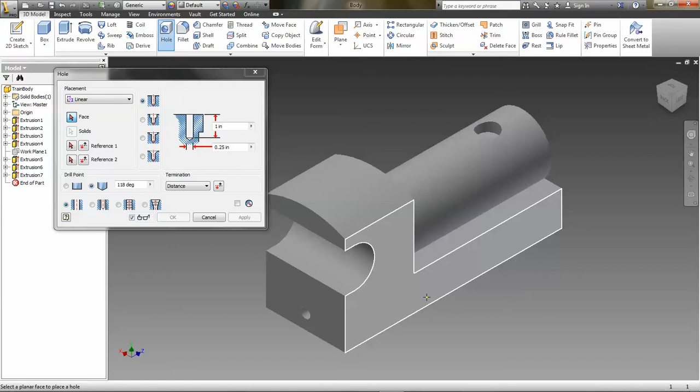Now the way this works is, and I see a lot of students have problems with this, when this dialog box pops up, or in future versions the marking menu or what have you, you'll notice I can pick any plane, right? Well, because Inventor is asking me which plane do you want to drill the hole in, or which face. So you can click anywhere and it's going to start to create a hole in that spot. That's not where I want that hole.

Now most students will try and click and drag that around, but the easiest way to define the location of the hole is to select, notice how reference 1 is highlighted here? It's going to ask me for an edge and allow me to type in a distance from that edge. So if I just click an edge there, now notice that red dashed highlight.

I can see from the dimension isometric drawing that I want that hole to be 1 inch from that back edge of the train. Then notice it automatically selects the reference 2 cursor. I just click the bottom edge, and now it lets me select the height of the center of that hole from the bottom, which is 0.5 inches.

Okay. Now the only thing I have to do now is make sure I select the proper features, because if you notice on the dimension drawing it says it's a 1/4-20 threaded hole. So the size is 1/4 inch right here, that's fine. Class 2B, that's basically the quality of threads, that's fine. 1/4-20 UNC, right hand thread, and then the depth, notice the depth is 0.875. Okay, so I need to make sure that that is 0.875.

It doesn't say anything about how far the threads should go, so when in doubt always make the threads go the full length of the hole, because you wouldn't want a hole to be threaded halfway down and somebody tries to put a screw in there, because you could damage it. So unless it says to keep the threads a separate distance, always put the threads the same distance as the depth of the hole. Okay, so now we click apply or OK.

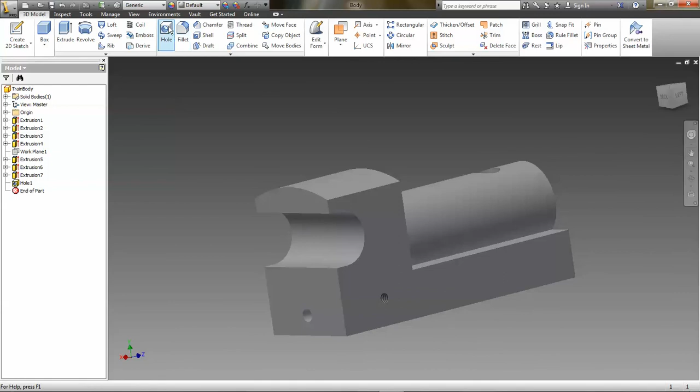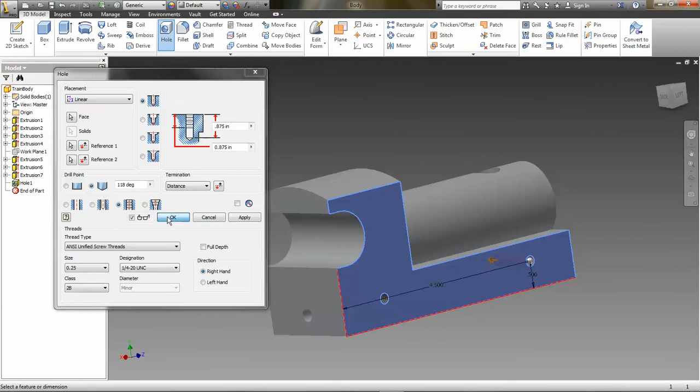There's our first hole. Now you can only create one hole per hole feature, so you have to do that same thing each time. Okay, my second hole is going to go over here somewhere. I use the reference again from the back edge. It wants to be 4.5 inches from the bottom edge. Click reference 2, 0.5. It should remember all the same dimensions and designations from your last hole. Click OK, assuming I did that right. Looks a little funky. I might have typed the height wrong, but that's okay.

Then we do the same thing on this side. 2 more holes. Whoops. 3D model, hole. Pick the face, put the hole anywhere, select the edge, 1.0, second edge, 0.5, depth 0.875, 1/4-20 threads, apply, OK.

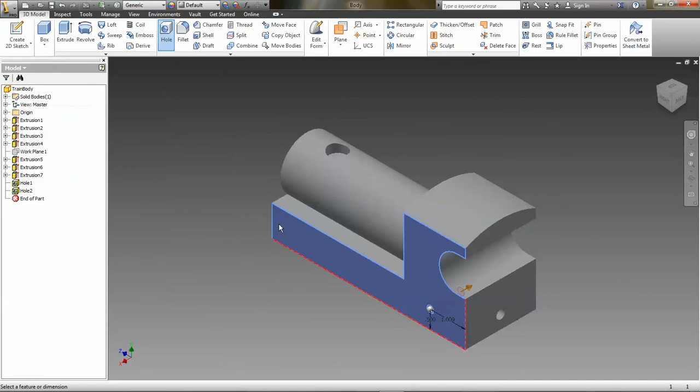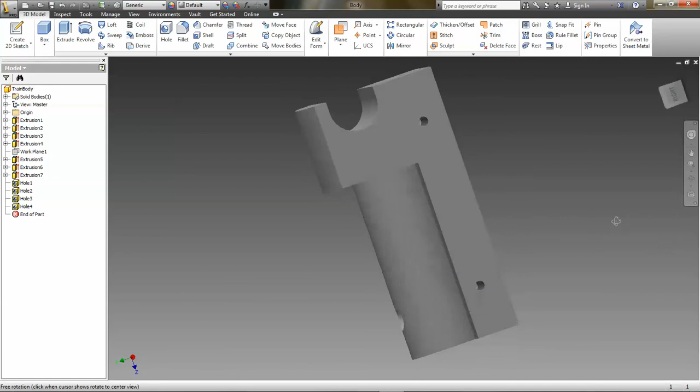Now, last hole here, reference 1, which is 4.5, reference 2, 0.5, depth 0.875, OK, and there's all your holes for the axles. Now, only one feature left to add. I'm going to show that to you in the last video.